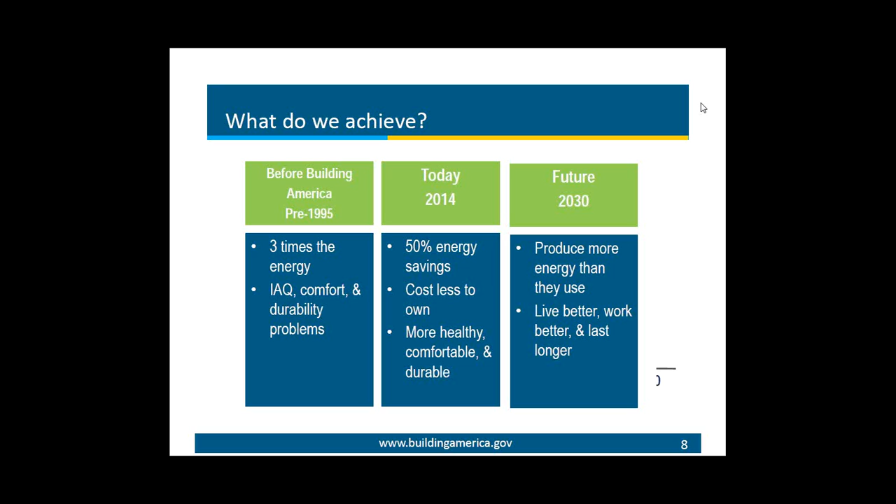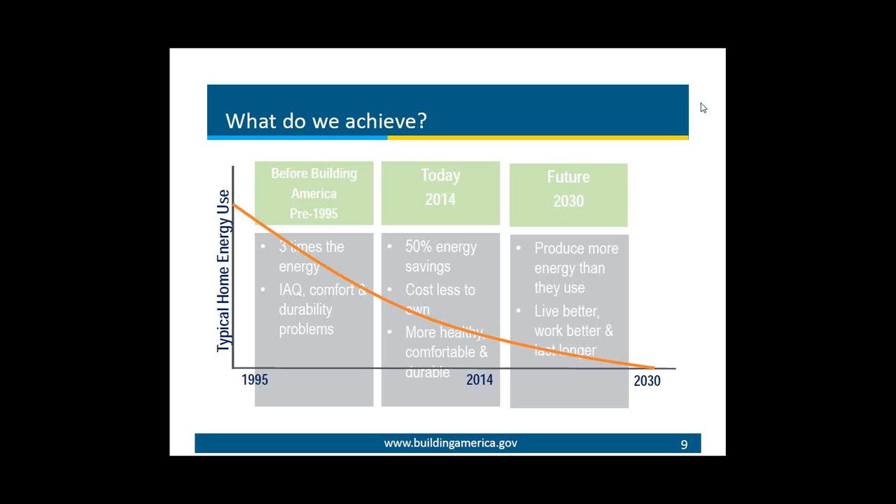In the 20 years of Building America research, we have spearheaded combining ultra-high efficiency with high performance in both new and existing homes. We are consistently achieving this challenging task. For example, in 1995, a typical home used 3 times more energy per square foot compared to today, and indoor air quality, comfort, and durability problems were common. Today, a home built to DOE Zero Energy Ready Home specifications uses less than half the energy and is more comfortable, healthy, and durable. By 2030, Building America will demonstrate that new and existing homes can produce more energy than they use. Do you want to know more about these proven innovations?

The Building America Solutions Center is your one-stop source for expert information on hundreds of high-performance construction topics, including air sealing and insulation, HVAC components, windows, indoor air quality, and much more. You can find it by the URL on your screen or by searching on Building America Solutions Center. Also, the Building America website provides information about the program, the latest top innovations and case studies, and there you can also subscribe to the monthly newsletter.

And now for today's presentation.

Our webinar today will provide an overview of how Building America has impacted codes and standards in the past through technical and market innovations. You will also learn about new content on the Building America Solutions Center that will help builders meet code requirements and code officials apply codes to new and emerging innovations.

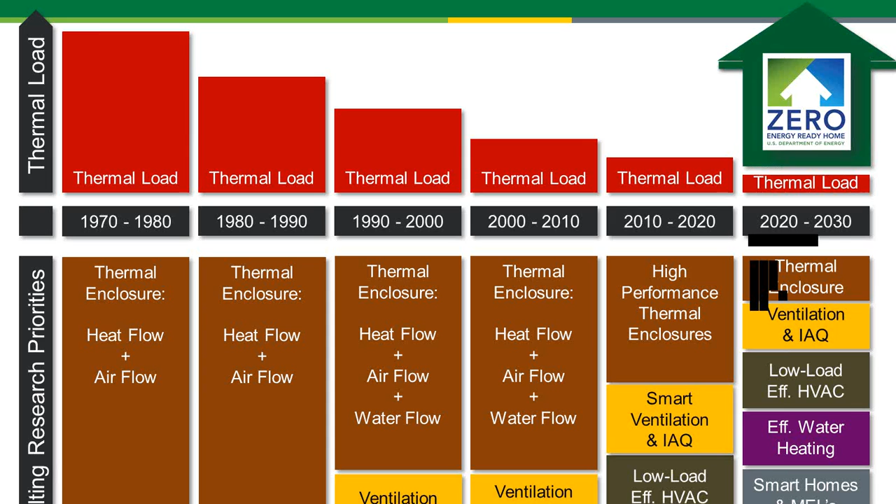And then as we got down to where we are today, we're focusing really for the next 5 years, Building America will be on 3 main things. And it'll be the high performance thermal enclosures, smart ventilation and indoor air quality, and low load efficiency HVAC. That's really where they want to focus, 3 top things for the next 5 years. And there'll be other things as well, but that's where they're going to probably be focusing most of their time. So as I circle it, this is where the target areas will be and where we're going to have most of the challenges.

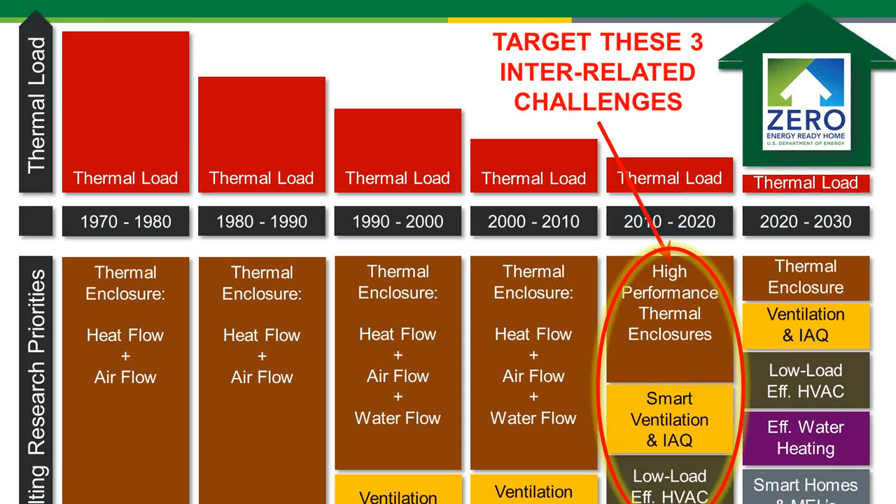And there will be some challenges with codes and standards as we travel down this path and the Building America research teams get more involved and start doing the research. And we're going to work more closely with them as well and see how we can integrate all of DOE's programs together to make every one of these research technologies that they're going to put forth successful.

So here's another way that Building America has enabled and advanced codes. Typically in Building America, we give these slides as intros because they have had a big impact on where codes have gone. This gives a little history of where the codes are versus where Building America is.

If you look at the gray bar, it's showing you the IECC code, and off to the left, the '06, '09, and 2012. The '06 is really where the big impact started happening with energy savings. From the 2000s, even the '95 model energy code up to 2006, there wasn't a lot of incremental energy savings. But when the '06 hit, we started seeing significant increases in energy savings. Now we're seeing not just energy savings but cost savings, as the codes program evaluates both energy savings and cost.

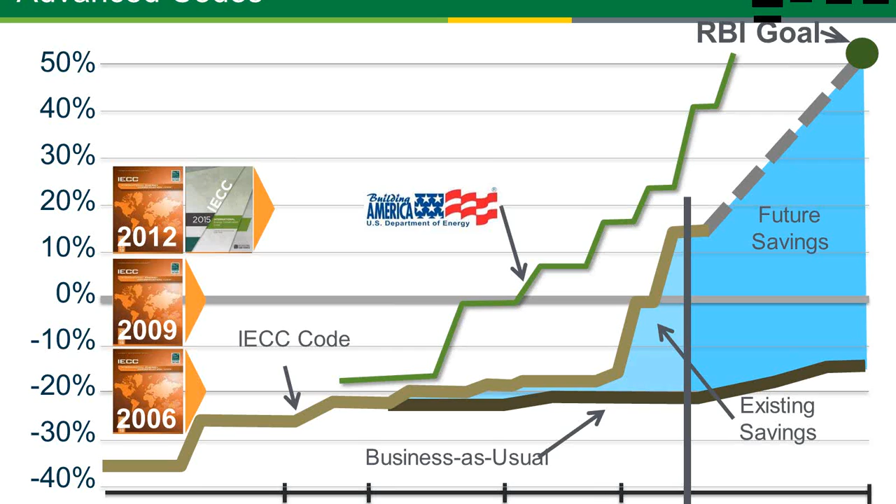As you look at the green bar, you'll see where Building America is, and they're actually a little above where the codes are. The point here is that what Building America does impacts the codes. The codes don't typically look at what the future may hold, but Building America looks at what's coming, at future technologies. So working with the codes program is critical, because Building America can give those things over to the codes program to help them know what's coming and better align them, setting them up so they're not up against an unforeseen barrier when they go to market.

The Residential Building Integration Program, which is basically under Building America, has some new goals. The new home goal is to demonstrate at scale market-relevant strategies for homes, and we are looking at offering savings of 50% or more by 2025. So we have a lot of work ahead of us.

Not only are we doing new homes, but we don't want to forget the existing homes goal either. In existing homes, we also want to demonstrate at scale market-relevant strategies for existing home savings of 20% or more by 2020, 25% or more by 2025, and then 40% by 2030. These are big challenges, but I know we can get there. These are goals that Building America and RBI are working towards.

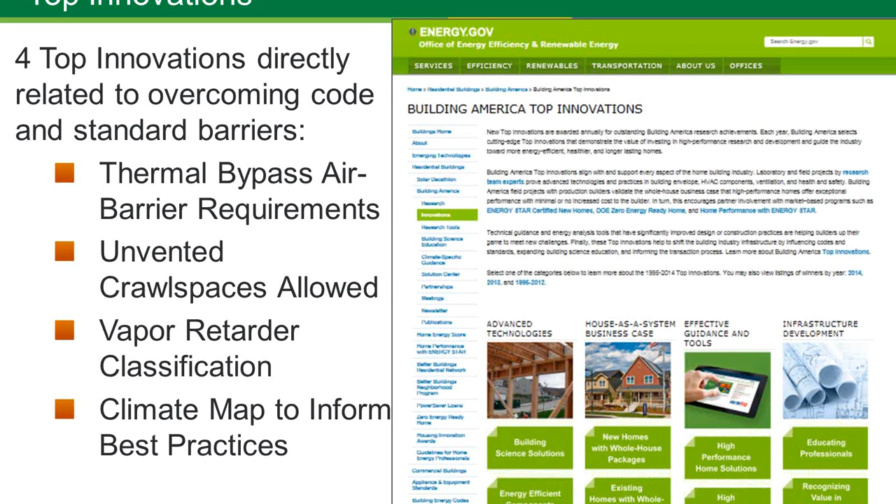We talk about codes and standards and barriers, but it was also a couple years ago, well, how can we better help not just the research teams, but builders, code officials? Let's get some more resources out there. There's a lot of good stuff. You could spend hours and days going through websites trying to find information on maybe just one technology, or if you're up against any type of barrier that maybe the code official's denying, and you're building, you can't go any further, and you're out on the site because there's one impeding thing that won't allow you to keep constructing on that building.

Where do you go look, or how do you know how to identify one? So this document was created called Guidance for Identifying and Overcoming Code Standard and Rating Method Barriers. Really it's just giving some approaches on how to identify codes and standards, and then some methods to overcome those, and then a whole bunch of resources. It's a resource, maybe a starting point for someone that doesn't know where to go look and needs to start looking at how they can go down this path of overcoming a code or standard barrier.

Building America has really defined a barrier as really 4 things. Maybe that in that code, standard, or rating method, it requires the wrong thing. So you're looking at in the code, and it's requiring something that your technology would not allow, or that your technology or whatever it might be is prohibited, so that it prohibits that Building America innovation, or discourages it, or it's not encouraged at all. And when I say that, the not encouraging it, which would lead to a better, more efficient home.

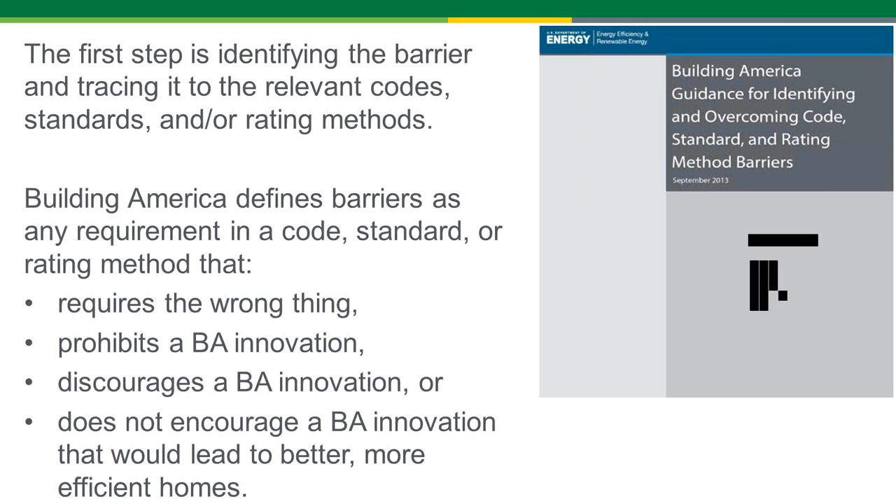So we'll look at these in more detail, but that's really how we're defining how do we first know that a barrier exists. And if you can go through those top 4 things, then that's kind of the starting point of understanding. So to put this in a little bit more simpler terms, or look at solutions.

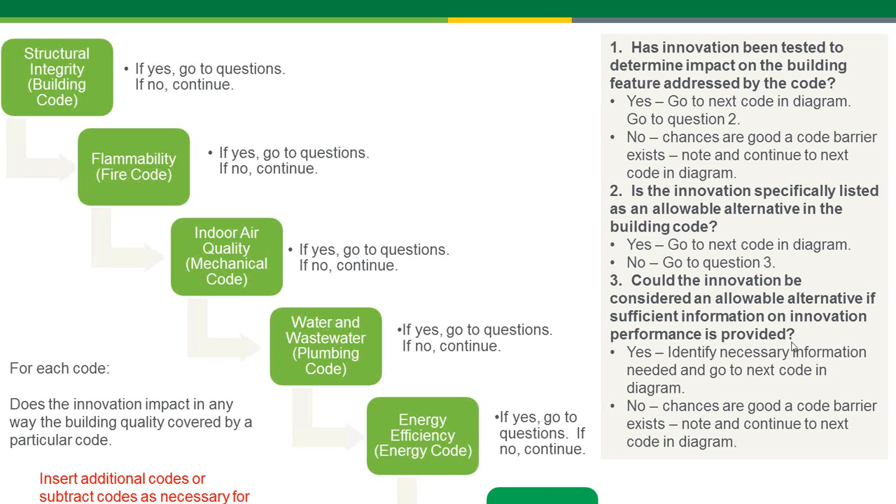So now we're looking at standards. I've talked about codes, and we have standards, and we have rating methods. I mentioned SMACNA, but we also have quite a few more. This is the same series.

You're going to go through a series of questions. If you have a certain technology or an innovation that you're not sure has a barrier, you'd go through and ask if there's anything that's going to impede you—any testing standard that might be out there. So the first question is: does this standard apply to my innovation?

You'll go through and look at ASHRAE—does it apply to my innovation? If yes, you go to the next series of questions, down through all the standards that are listed, and there are several more.

This is just a snapshot of a few of them, some of the higher level ones, I would say: ASTM testing standard, ASME, SMACNA, National Fenestration Rating Council, UL—Underwriters Laboratory, another laboratory of testing. So there's a whole bunch of standards you could step through to see if one of your innovations or technologies might be up against a barrier.

This might not even apply to you. Your first step might be to do method number one and reach out to someone with existing knowledge in that innovation or technology you want to install, and start from there. But this gives another path to help someone identify if they actually have a barrier—just one option for them to go through this series of questions.

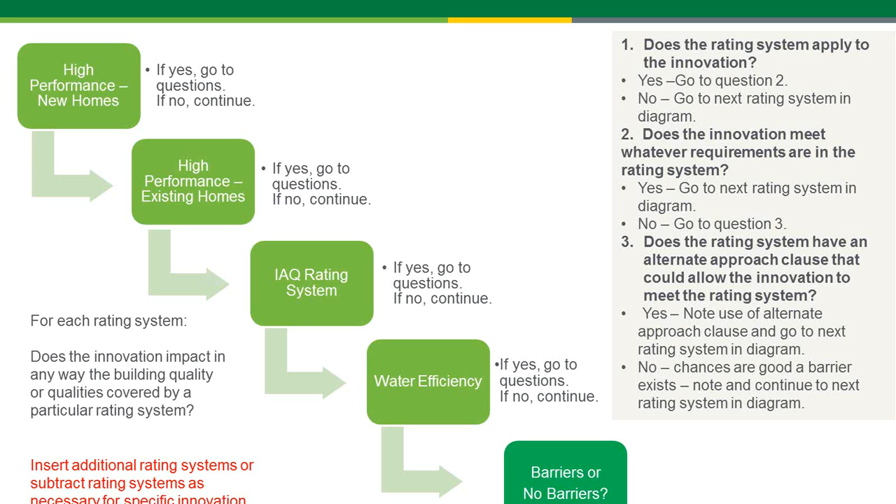Water efficiency—you might be dealing with a new high efficiency water system design, a heat pump water heater, whatever it might be. You want to make sure you're not up against any barriers, so you get another series of questions you could go through.

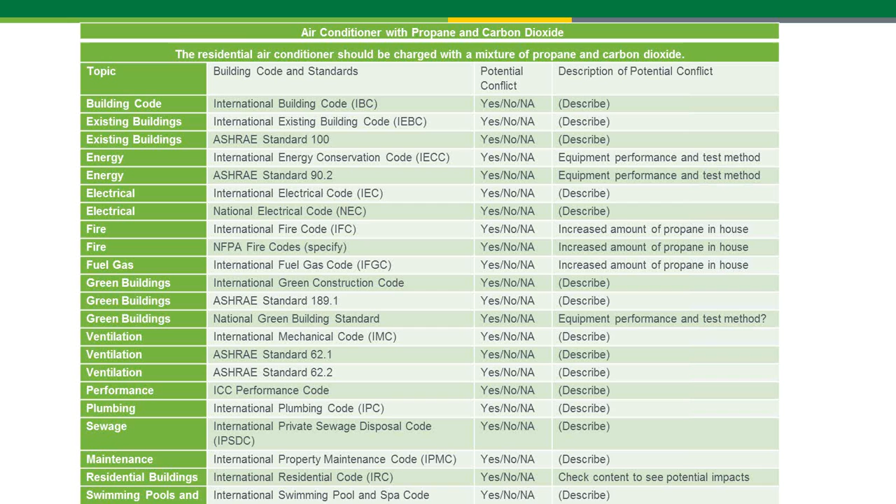This one deals with several different codes where I might have to go to the fire code because of the propane I'm using, and maybe the distance and how I'm ventilating this air conditioner. There are a lot of things to look at, but again, it's best to go to some experts who might be able to help you get past some of these - that would be your first step instead of funneling through all these codes.

So I've talked about how to identify a code, standard, or rating method, and 3 ways of doing it - and they're not easy. They can be very time-consuming to go through some of those series of questions and identify, especially if you have several codes you're looking at, and it might be impacted across 7 different codes.

Approach number 1 is search existing materials. So for identifying barriers, we were searching out existing experts and asking them to help us identify if I have a barrier. Now that I know I have a barrier, what's my approach? Well, there's a lot of material out there on the website, and as you well know, you could spend days trying to go through some of these.

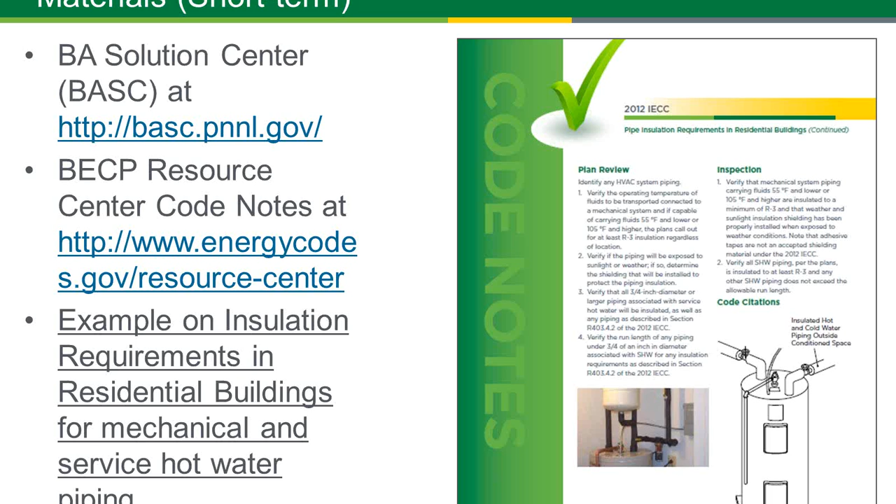There's a whole list of code notes out on the Codes Program's website, and here's the URL, energycodes.gov/resource-center, that you can go out to. So this is just one example of existing materials.

And how do you do that? I mean, if it's not addressed in the code, how do you do that? And so that's where we're trying to give resources to help overcome this.

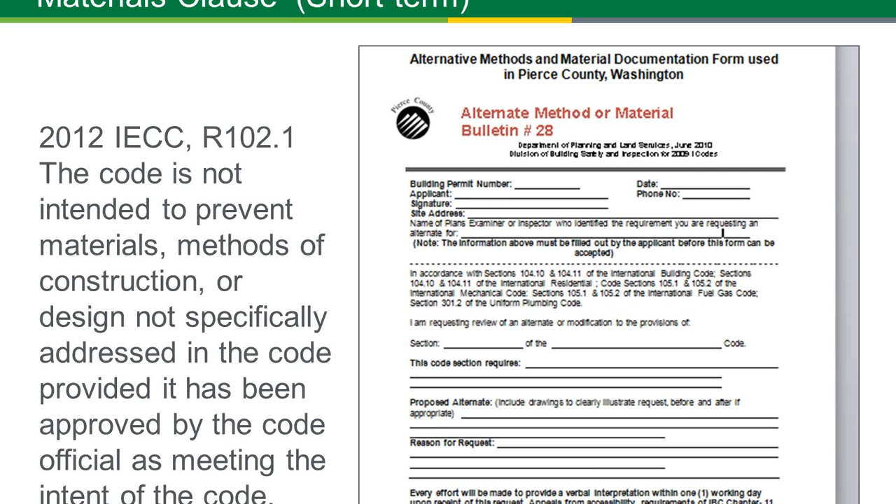But this is a system they've used as an example, that if a builder's looking at using some alternative method that's not in code, and they want to use this clause in code to meet the intent, they want them to fill out this form. Maybe this form is something another jurisdiction could use. There probably are forms like this at other jurisdictions, and I just wanted to pull this one up as an example of overcoming this as approach 2, which would be short term. It could be that it gets approved by the code official and you're on your way.

Cladding attachments was a biggie. As the energy code, the insulation becomes more stringent, where we're getting thicker insulation levels, continuous insulation in the prescriptive path - how are we attaching these thicker pieces of rigid foam board? So in the 2015 IRC, we now have provisions allowing for those thicker pieces of insulation.

And I'm going to show you, because we just posted a code compliance brief on this. We have vinyl siding attachments - that is a new provision, completely new in the IRC. Insulated siding is also new. And air barrier - not so new, but we've continued improving on the air barrier requirements in every code version. A lot of that, most of it, the beginning of it, had to do with Building America, and their top innovation is the air barrier.

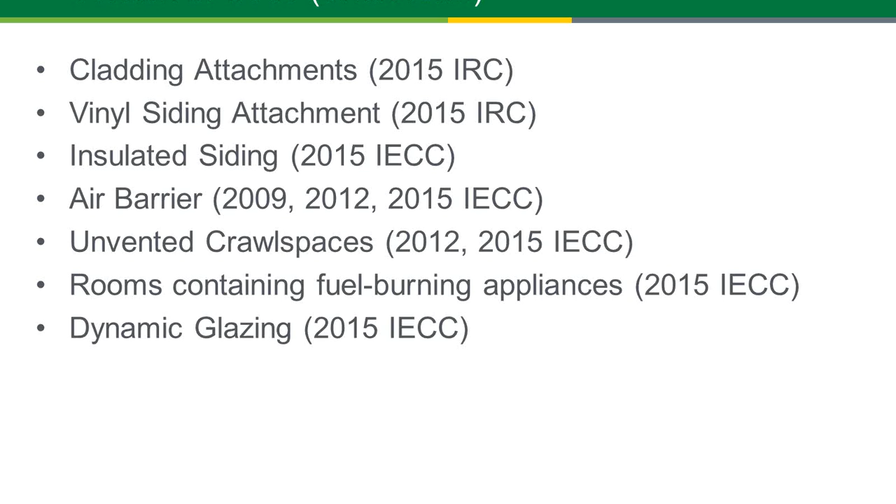So unvented crawl spaces again, another Building America item, 2012-2015. Rooms containing fuel burning appliances is another new provision. And then dynamic glazing - what is dynamic glazing? We'll get into that in a minute.

So I went through 3 approaches, and now I'm on approach 4, which is the medium term. Though I showed you the short term ones, now we're looking at formal interpretation. This is where I call it medium because this might not be as fast as you think - it's not going to take an hour, unless there's something already out there written that you could pull. So let's go through some of these.

So let's say you want to get a formal interpretation from an ASHRAE standard. Well, they have a way to do that, and they have interpretations out there already published, and you might be able to find one that has to do with your technology. So I've listed the URLs. It might be IAPMO, for plumbing, so you might want to go through their resources if it's an issue with that. And they have assistance that can help you for interpretations as well.

There also is the ICC, the International Code Council. They post opinions, and they do more than post opinions - they also have an evaluation service as well, so I'll get to that. And then you have the fire codes - the fire codes actually has a way of doing interpretations and answering technical questions on the fire code. And then there's SMACNA, which is another way.

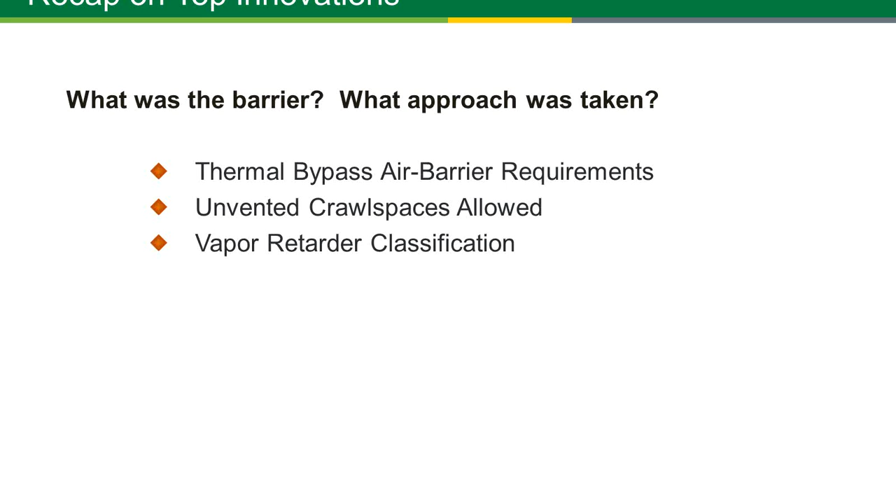So I've talked about, I'll just recap on the approaches. I went through 4 approaches, and now I want to get back to Building America's top innovations that they've done. These are the top 3, and these have been out on their website for a while now. We have what was the barrier and what was the approach taken. These 3 didn't go through the guidance document that was created, because that guidance document, that resource, was just posted just over a year and a half ago, I believe. So that wasn't available to them. So what were they doing? Basically, I looked at all 3 of these innovations, and they followed one or more of the paths that are in that guidance document. But it took them a while to get some of these into code. So let's take a look at each one and see what they did to get to where they are today.

So let's look at the thermal bypass air barrier. That's a lot of reading, so if you want to look at some of these, you might want to download the presentation and read some of this in more detail. I'm just going to give a quick overview, but the thermal bypass air barrier was a very, very big success for Building America, meaning sealing the holes in a building, caulking around the windows, the doors, the damper, all those things. They've been in code for a long time - seal around all your openings, seal your ducts. It's not language that has not been around. But what Building America did is they wanted to make sure we added some additional language on how to seal all those cracks and holes and you name it.

What happened was the barrier here actually fell into one of the barriers we've defined: it does not encourage a Building America innovation that would lead to a better, more efficient home. That was one of the 4 barriers I listed up in the slides above. So what they did was determine through research and inspecting building features that this thermal bypass checklist actually made it into the Energy Star Home version 3 specifications way back in 2006. It was so successful, they did a code change proposal, and it got into the IECC for the first time. Now, there was language to seal up all your cracks way back in the 2000 IECC, seal everything up, but this provided additional language on where all those areas are that can impede and cause leakage into the home. So now we're tightening up the home. Now we have a checklist in the code, something inspectors can do a little more thoroughly, going through this checklist, and builders have information on how to seal all these areas within the building envelope.

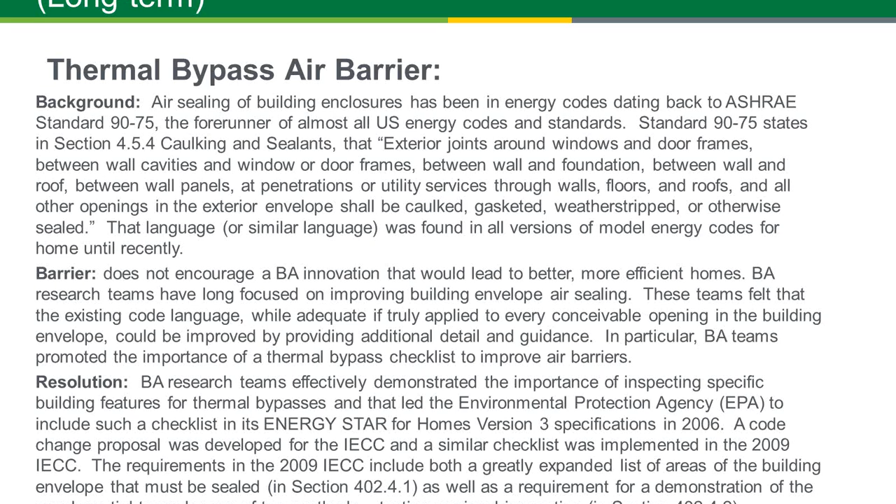I think it's a great checklist, so go out and take a look at it if you haven't seen it. It's in the 2015 code. Keep in mind, if you're on the 2015 IECC in your area, the visual inspection has now gone away—all homes have to be tested to a certain air leakage requirement. So that was the air barrier.

That technology took many years. It started in '06 and has continued to grow.

So what happened with unvented crawl spaces? This is another leading top innovation from Building America, and this took a few years too. Way back in the older codes, crawl spaces had to be vented—that was in the code. So what was the barrier here?

This barrier fell into one of those definitions we have—again, one that didn't encourage a Building America innovation that would lead to a better, more efficient home.

So what was happening in these hot, humid climates was, well, the code says I have to vent this crawl space to the outside. In a hot, humid climate, you're bringing in all that moisture, and if you're not sealing that floor completely with a good seal, you're bringing in moisture and causing mold. That was a big issue. So Building America researchers tested and tested, and proved the technology for an unvented crawl space.

They got it into code, and this was a huge win for Building America—now we have provisions, and these crawl spaces are saving up to 20% on the heating and cooling energy of these homes. And now they have really reduced the risk of moisture by sealing up these crawl spaces.

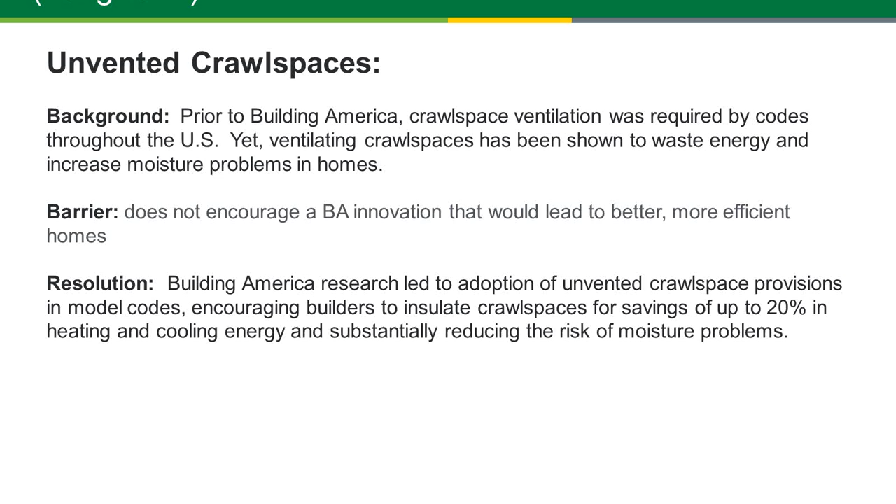So let's go to the last one: the vapor retarder. This took three code cycles—and a code is published every three years, so this took a long time to get right. It's still being tweaked today, just like the air barrier, but at least now we have it to where it's good.

Before, in the old codes—and this is dating me because I've been around a while, not as long as Todd, but a while—it had a one-sentence liner in the code: a vapor barrier must be installed on the interior side, the warm-in-winter side of the wall. Boom, that was it. And what is a vapor barrier? Building Science Corp took the leading edge on this one for Building America, and they researched it with 14 different wall assemblies and a test hut, and I have some pictures to show you here.

They went through and classified vapor barriers into 3 classifications, going through every climate zone to determine where and what type of vapor barrier should be installed. This was a huge success, and now over 100,000 new homes are constructed each year with effective moisture control. These homes are now more durable than before this vapor retarder classification got into code.

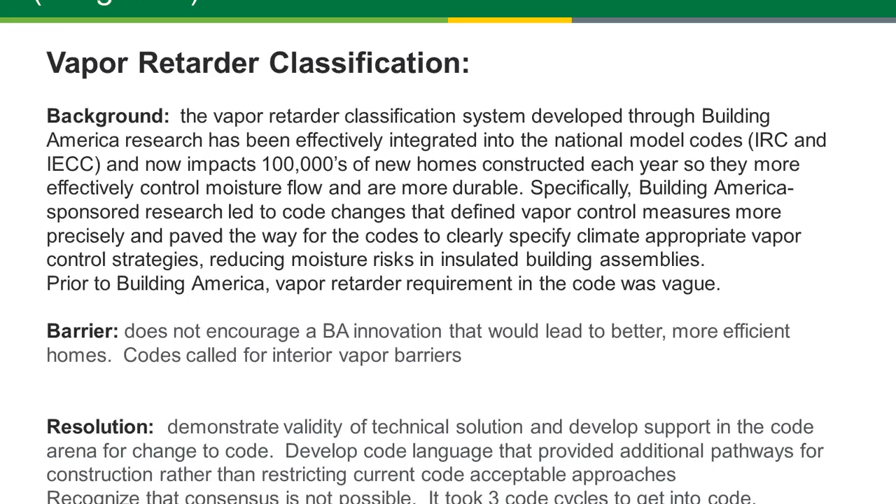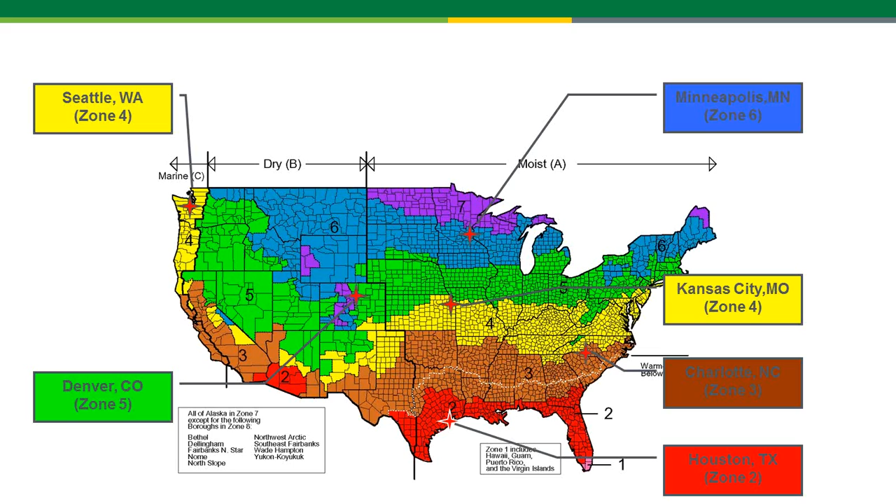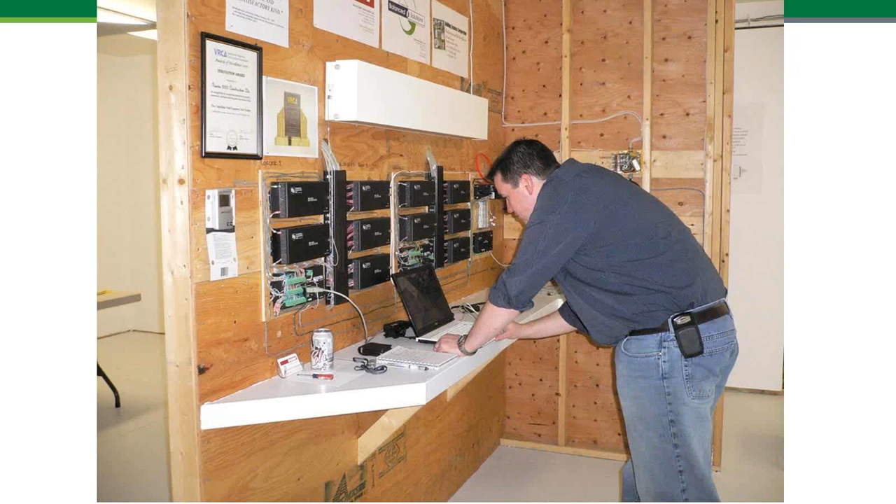All the system controls testing the moisture flow, and this isn't just testing over a series of one month—this is over a 12 month period, testing climate zones, especially if you're in a climate zone that has a fluctuation of heating degree days and cooling degree days, such as where I live. I have the whole realm of cold to a very hot 110 degree dry summer.

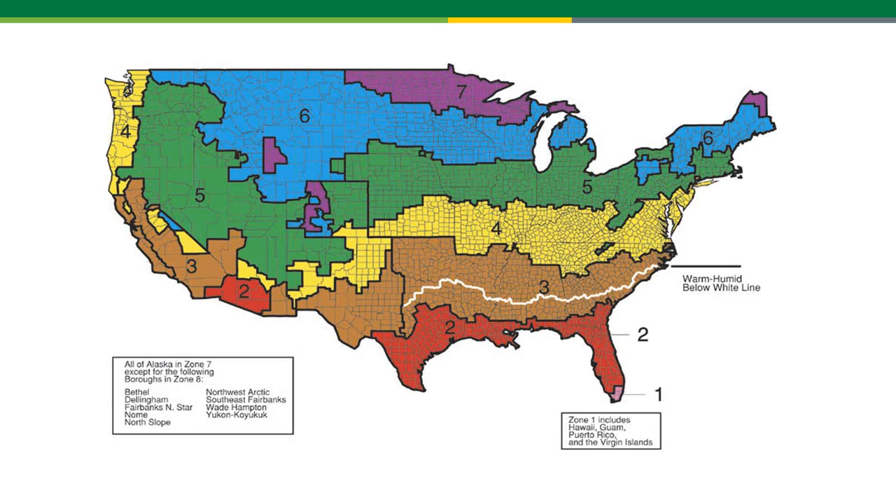So they've done a very excellent job of getting these vapor classifications into code. Here's the climate zones, and this climate zone map has been in code for quite some time, since 2006. We used to have 18 climate zones in the older codes in the IECC, and now we're down to 8.

This is the climate zone chart that Building Science Corp used to determine vapor retarder classification—when a vapor retarder is not required and where it is. So you've got zones 1 through 3 where no vapor retarder would be required. You get to zone 4, and now we're looking at the perms on vapor permeability, and classifications for what Class 3 means, what Class 2 means.

And here is for Class 3, which is the perm rating of under 1.0 perm. What does Class 3 mean? I'm not going to get into all the details of this.

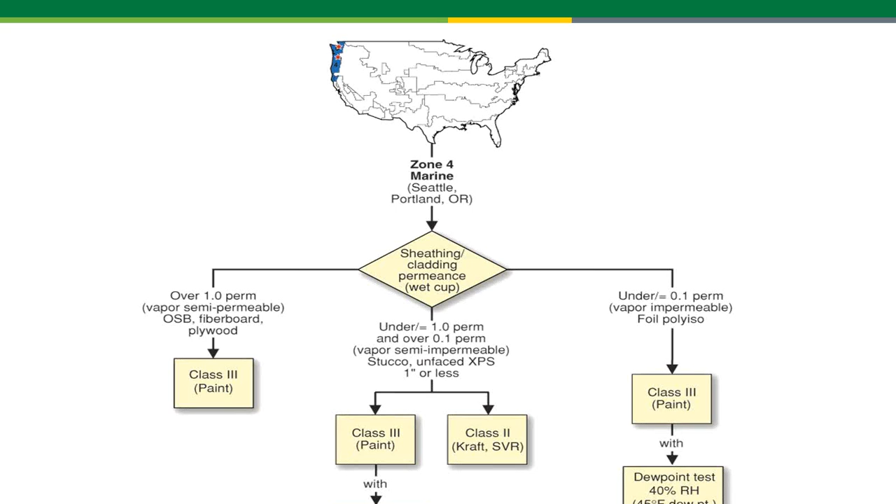This information is in a lot of different places. The IRC has a table in the International Residential Code that shows the classification and what climate zones apply for what vapor retarder. We also have, out on Building America, guides depending on what the measure is. For example, I did a code compliance brief on double wall framing and where the vapor retarder should be installed on a double wall frame. This is a good reference—go out to the Building America Solution Center.

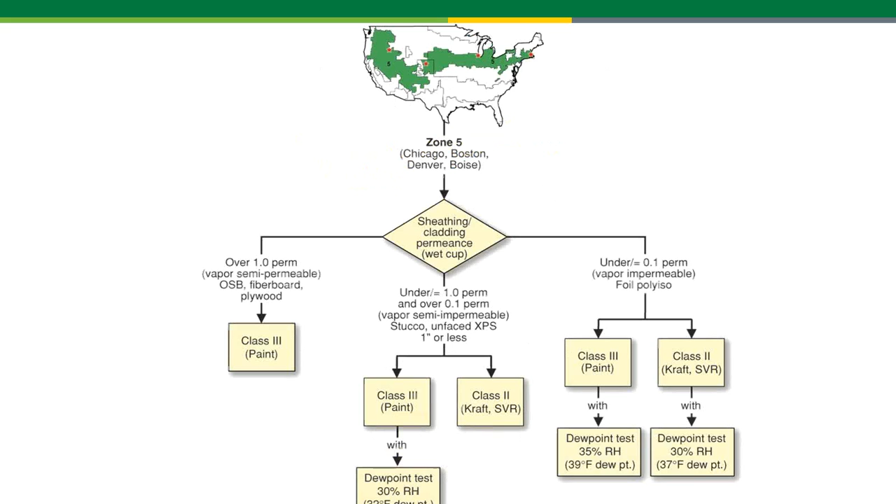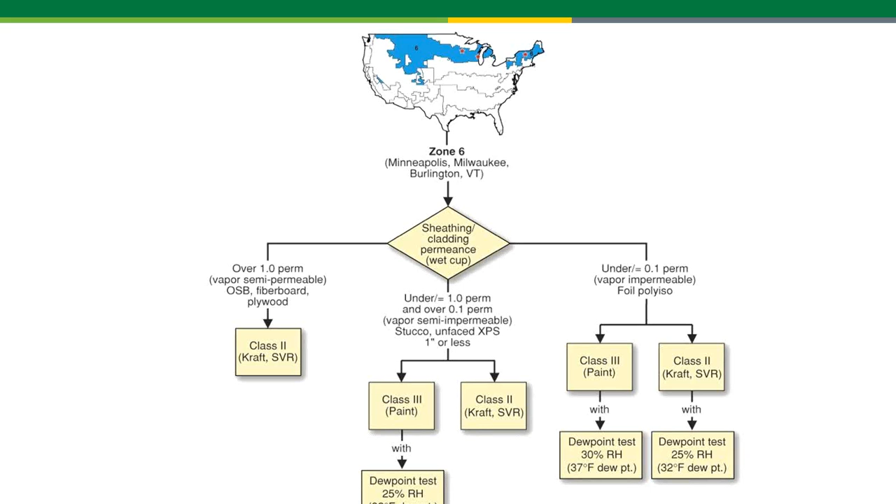Zone 4, here's the Class 3 classification, which really is your paint with a perm rating—the paint would have to have a special perm rating. Zone 5, now we're getting into different classifications. As we get to Zone 6, we get into a Class 2, which can be kraft paper, like stucco unfaced, with a different perm rating.

A lot of detail goes into writing some of these code proposals depending on what that innovation or technology might be that you're trying to get into code. But there's people out there that can help you: manufacturers, and a lot of resources like Building America's research teams. So if you're going down that path, go seek out these experts that might be able to get you down that road.

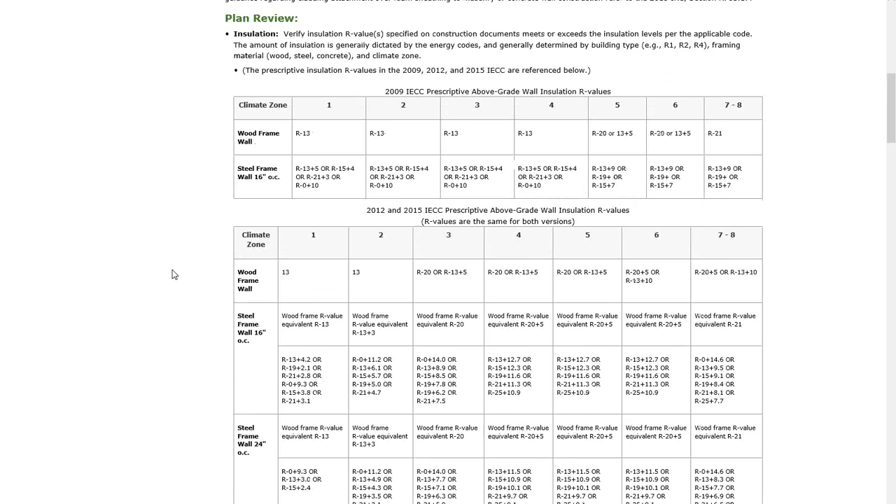So here we have plan review, and here it shows the provisions for if you have a wood frame above-grade wall. It gives you the specifications for the prescriptive insulation values, and this is where we have two codes.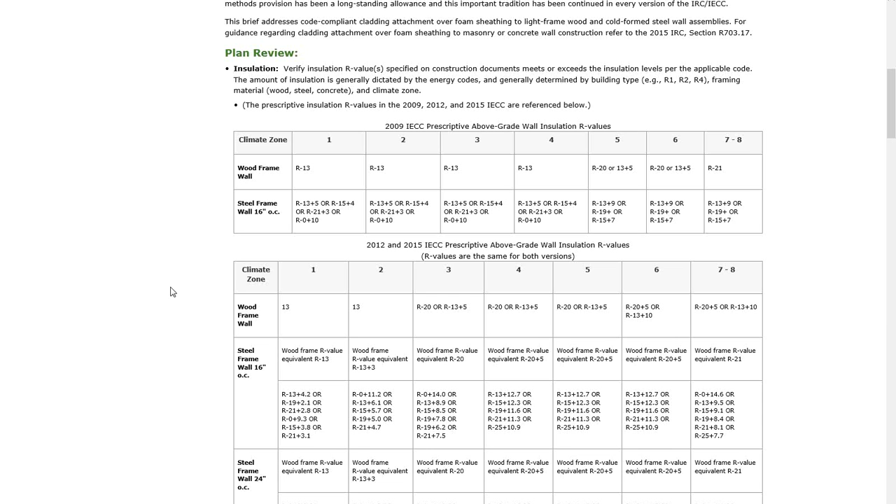So when I talked about having one technology and dealing with a thicker piece of rigid foam board, the IECC might be telling me in my climate zone that I have to have this continuous insulation of a certain thickness, and how am I installing that? I got to go to the IRC because I need specific fasteners to do it. So you have two codes you're working in for one technology, one provision, or one piece of material. But it gets a little deeper.

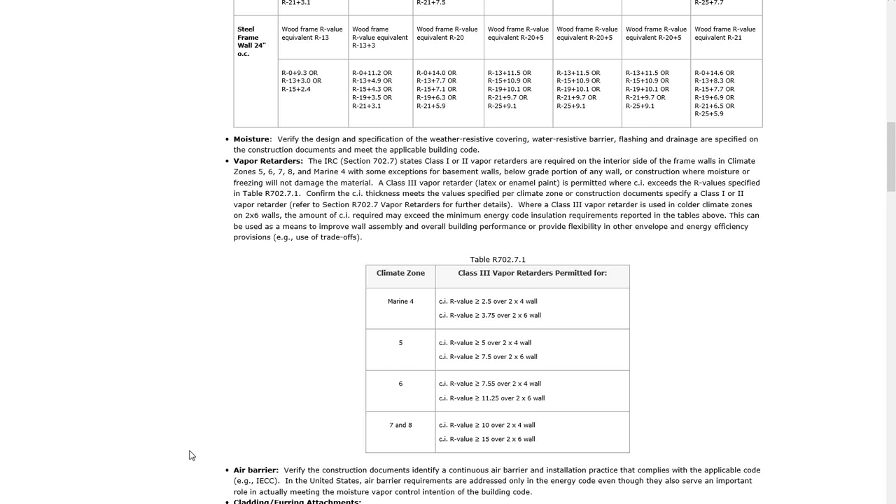Not only do I have that, but where does the vapor retarder come into play? So really looking at one wall assembly, you're dealing with an air barrier, the moisture, the attachment of that wall depending if you got foam board, if you're attaching a piece of continuous insulation foam board, and climate zone. You got wind loads, dead loads, a lot of things to look at. The intent of these briefs is really to bring it back home and tie it all together, to simplify it, to bring in all the things that might be applicable, where they are in the code, and really help builders and code officials get this technology out into the field.

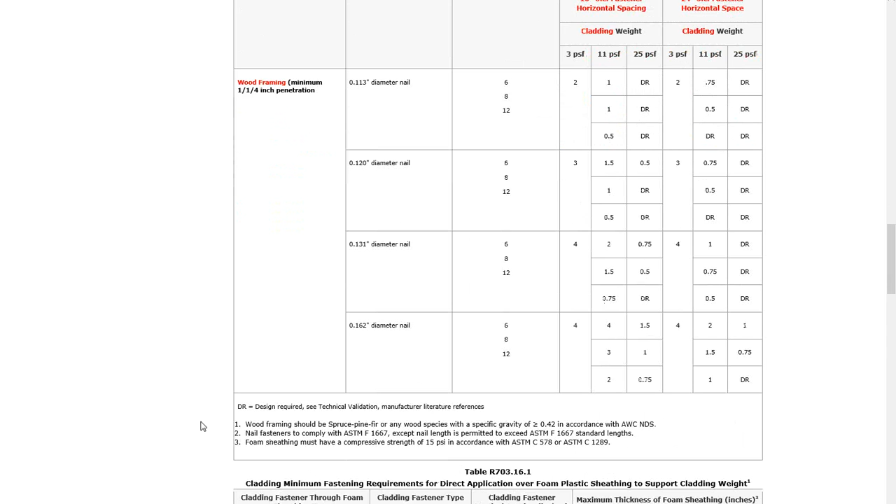So let's scroll down a little bit more. Here are the fasteners, and I'm not going to go through these because this might not even be applicable to you, but I wanted to give you an example of this brief that's out there. I'm going to scroll down to the very bottom where the technical validation is.

With the technical validations, there are some manufacturers that have come up with validations for these thicker pieces of rigid foam board. They're great - I've read these, and they did a really good job of specifying how to do these fasteners on specific framing materials. There's also some reports that have been done, from Building Science Corp, Applied Building Technology Group - some great stuff. So if you are doing foam board thicker than 1.5 inches, this might be important for you to take a look at some of this information.

So let's go back over to my slides.

I'm going to change my tune now real quickly. I've been talking for a while - I've talked about barriers, the codes program, Building America, but I hadn't talked about the Appliance Standards program, which is really important because they handle all the appliances. I had one of the leading people from the Appliance Standards program give me a couple slides on some recent activity that might be important if you're looking at appliances.

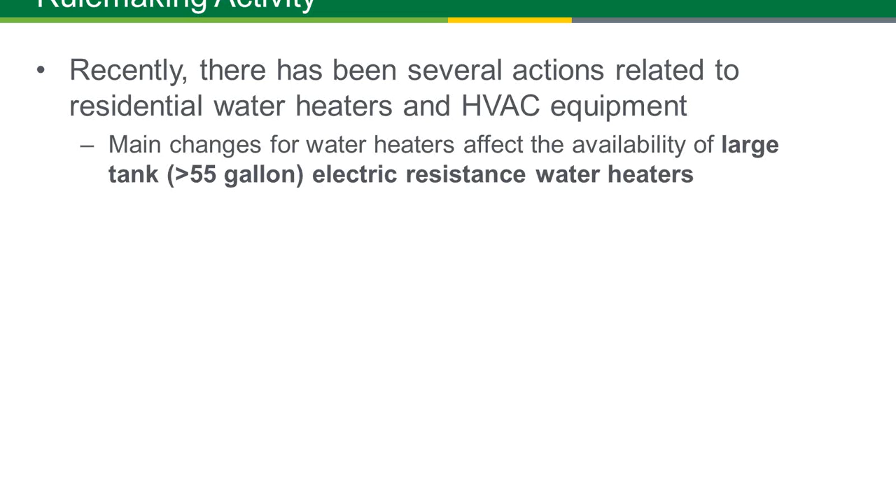So one recent appliance standard rulemaking activity is on residential water heaters. The changes are on the large tanks, greater than 55-gallon electric resistance water heaters. There have been some changes, and if you're interested in that or have questions on the Appliance Standards program, feel free - I can get you in touch with the person who's really knowledgeable on the appliance side. So let's take a look at some of the activity on water heaters and what's happened here.

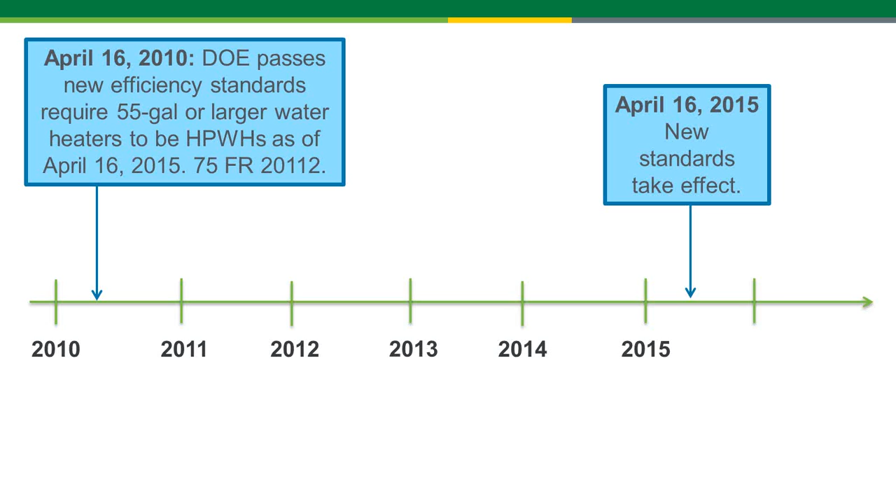Looking at the timeline from 2010 to 2015: back in 2010, new efficiency standards passed requiring 55-gallon or larger water heaters. Heat pump water heaters now, as of April 16th, 2015 in the federal regs, have a new parameter. She wanted to make sure that if you weren't aware of this new activity, it might be of interest to you - the new standards for these newer, larger systems took effect April 16th.

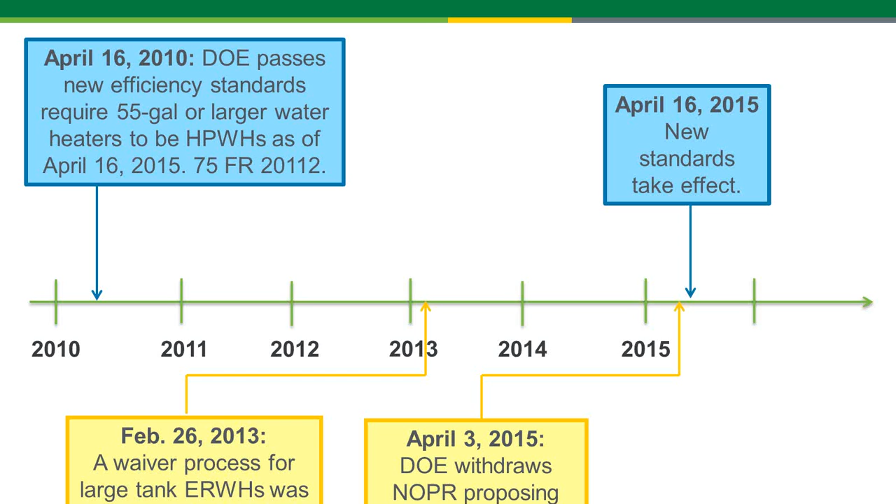Another thing that happened - on February 26th, way back, there was a waiver process proposed on these large tanks, and I think I have a slide here that goes through some of this.

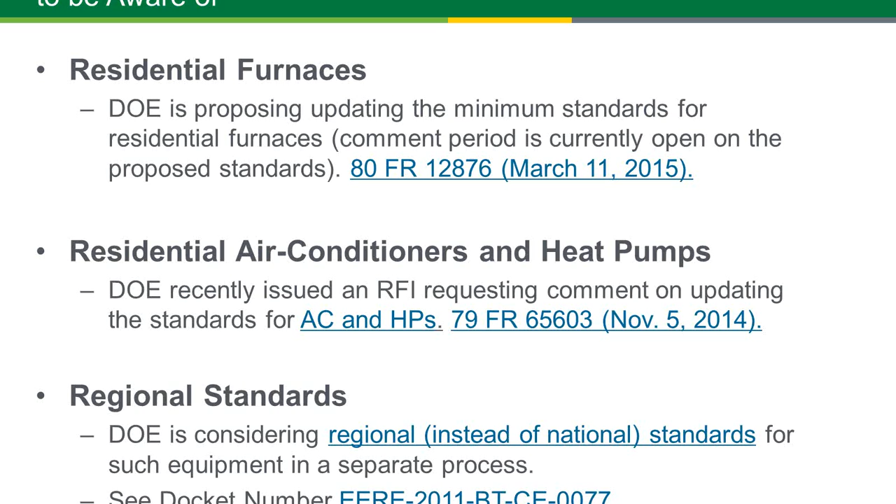While I'm talking about appliance standards, I'm going to jump back to the codes program because they have some things happening as well. On the codes program side, there's a request for information on their cost effectiveness methodology. That methodology has been out there, but they've extended the time frame for comment to June 3rd.

There's also some additional information happening with the codes program, and they're going to have a stakeholder meeting. This stakeholder public meeting is open to the public, and they want your ideas on concepts for the 2018 International Energy Conservation Code. This is the next code cycle that's going to come about.

They want to know what your concepts are. They want you to participate in giving them your ideas. And they're also going to present their own concepts on what they might foresee the 2018 code to look like.